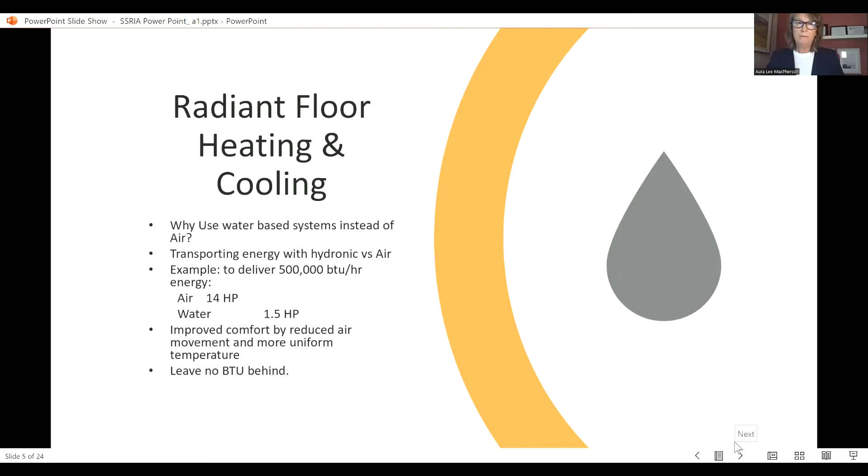We started in 2001 and installed our first in-floor heating into a school, in a crawl space. Most schools at the time were coming in around $2.20, but this one came in at $1.47. I said, wow, that's kind of interesting.

Then we had the opportunity to do a school in 2012, and we did in-floor heating and in-floor cooling on a crawl space. It came down to $1.04.

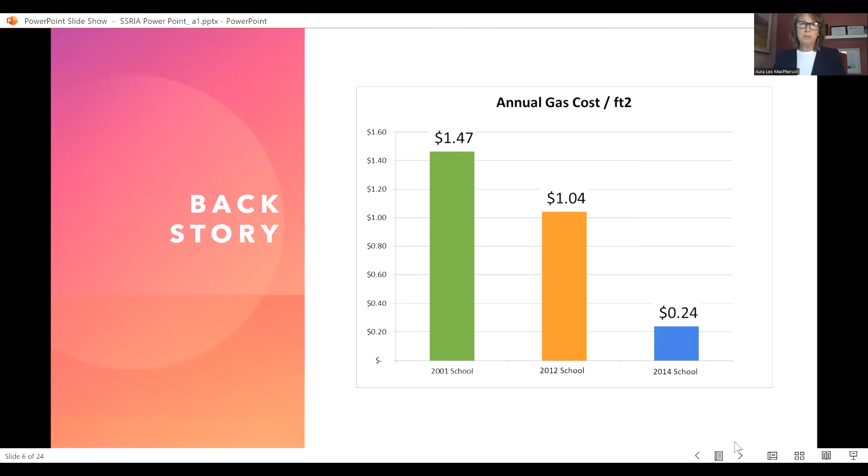We went, wow. Two years later we did another school, but this time slab on grade, in-floor heating, in-floor cooling. We only insulated around the perimeter of the building because we were curious what Mother Nature, what the earth, could do to help warm and cool that building. It came in at 24 cents, and we went, wow, this is going in the right direction.

So I'm going to talk a lot about thermal mass, and I wanted to give you an idea of what thermal mass is. The teepee is a really good example of how it was used the first time. The ventilation system of a teepee is award-winning by today's standards. They put the fire in the middle of the teepee and circled it with rocks. The fire radiates heat, and the rock materials take on that warmth, so that when the fire goes out at night, there's still warmth and comfort in the teepee. That's a really good example of activating thermal mass.

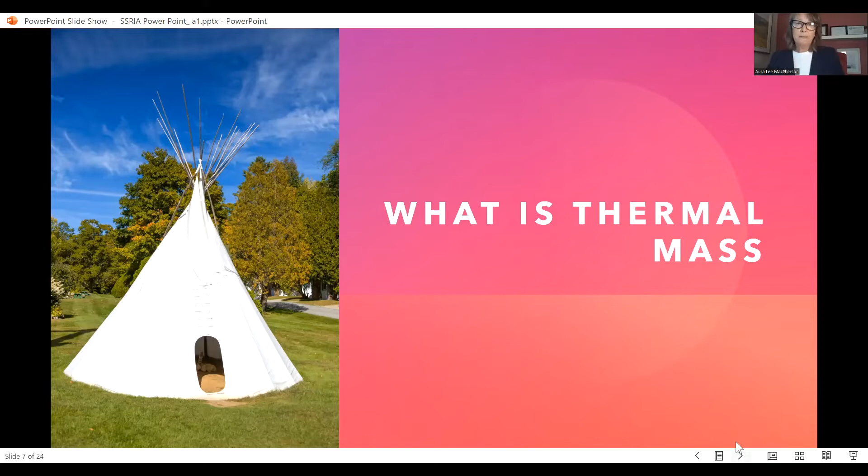Fourth, I was doing some volunteer work, and I had the opportunity to work with Star Blanket Cree Nation. A few members came to me and said, hey Aura Lee and Murdo, we're really concerned about our homes because we think the houses are making us sick.

So that's when the Blanket of Warmth project started. When we went out to see the homes, the First Nations called it a wicked problem. It had been around for a long time. The homes had damp, cold, musty, energy guzzling basements that weren't working. The HVAC system was not working.

Because it had been around for a long time, we had this opportunity to just do whatever we wanted, because nothing had been working. So we said, okay, let's shake this up. Let's use the 17 goals of sustainable development as a platform to see if we can address this issue. And so that's what we did.

The 4 pillars of sustainable development are economy, environment, culture, and social values. There's always a lot of talk about how much something costs or what's the impact on the environment, but we rarely look at the culture or social values. But if you want to design based on the 2030, 2040 global goals, you have to ask questions about culture and social values. That's why Sherry and I said, let's talk about culture, and what affects culture in Alberta, Edmonton and Saskatchewan is quite a bit different than what affects Toronto. So using the 17 goals gave us the tool belt to ask some really good questions.

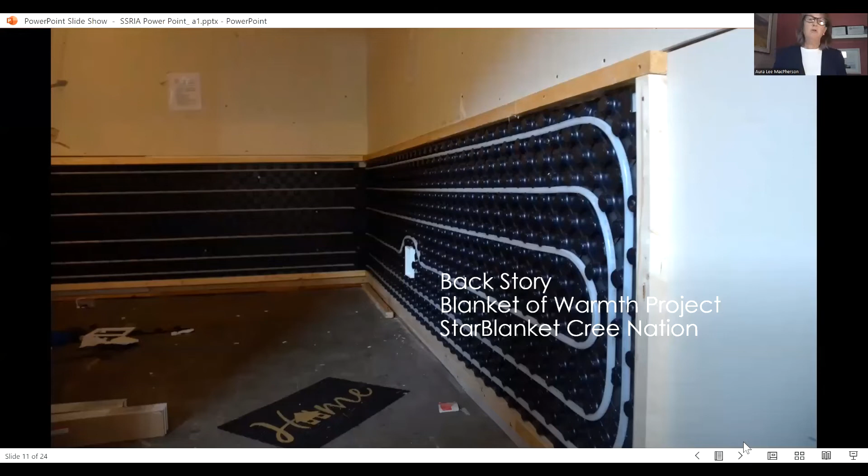We had absolutely no money for this project, so we couldn't tear up the floor and put the PEX piping in the floor, which you usually do. But we had won an ASHRAE award for putting the PEX piping in the walls, and we won that award in 2012. So I reached out to my girlfriend, Nicole Miller at Uponor, and I said, Nicole, would you help me on this project?

And within 2 seconds, she said yes. So we used the Fast Trak from Uponor and put it on the walls. It took like a day to install, it was really quite quick and easy to do. So that was the first innovation we did.

The second innovation we call HVAC art, because remember, we're HVAC nerds. What we did is we looked at what was working in that basement, and the furnace was doing a good job. So we said, let's attach RadiantLink to the furnace and make that furnace work even better. We take the warmth and coolness that the furnace and the air conditioner create, and we put it through RadiantLink.

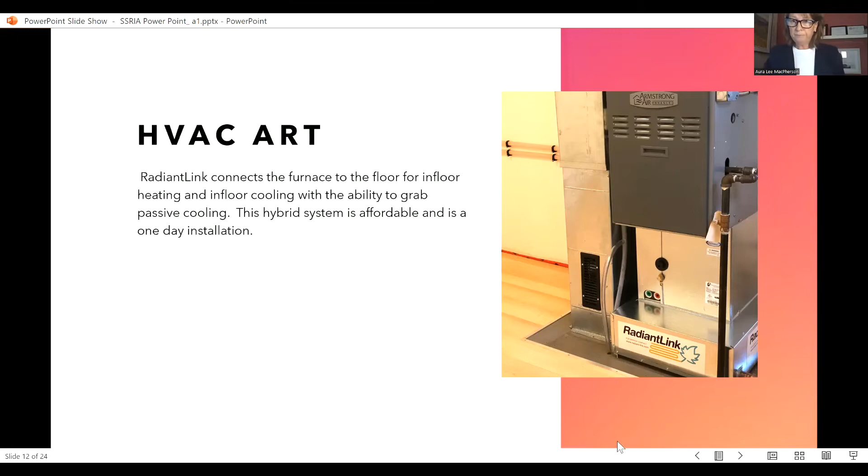We convert that into hydronics, and we're able to passively cool the home. So this is a hybrid system, it's affordable and it's a one-day installation. I'm super proud of our control panel. HVAC design requires simplicity and elegance, and I really think our control panel represents elegance. We've got a small pump, our control gauge and expansion tank, and that's it. That's all there is. So it really is HVAC art.

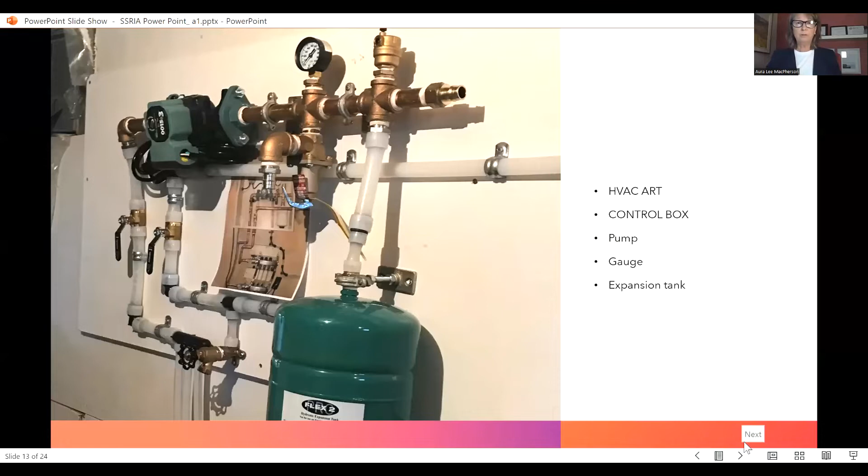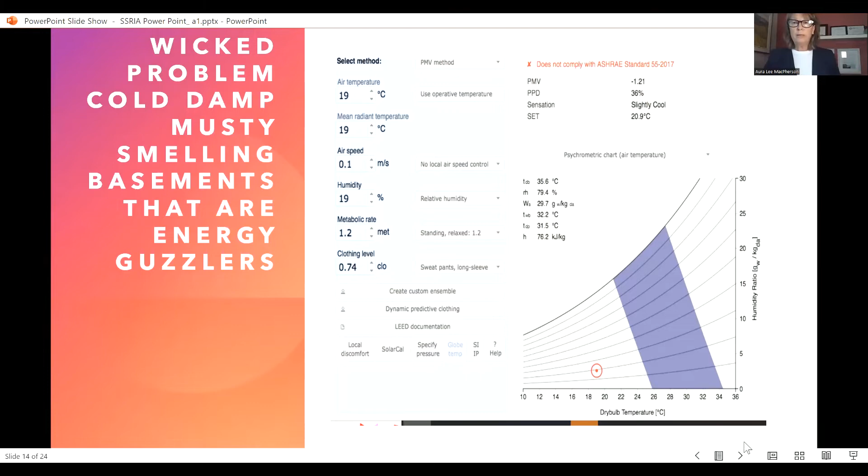When we started tackling the problem of the cold, damp, musty, energy guzzling basement, we reached out to the university and got a capstone student project started with the U of R. We compared 2 houses, one with RadiantLink and one without, and they were both about the same. The home without RadiantLink did not comply to ASHRAE standard 55.

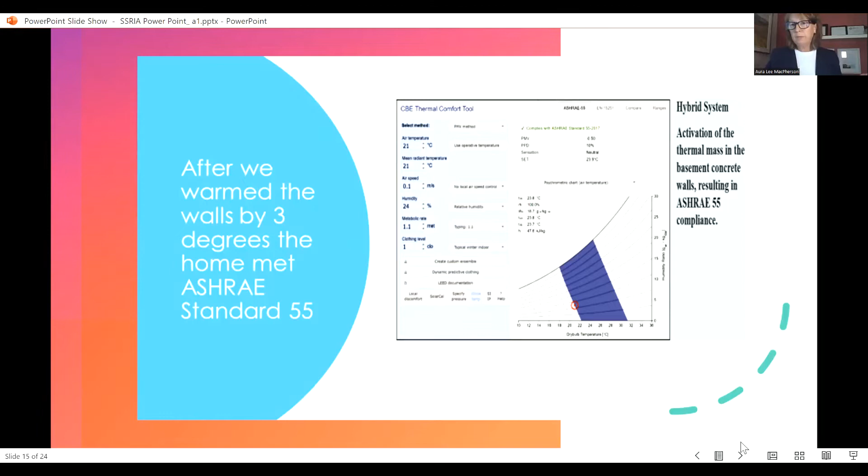The home, after we installed RadiantLink, we were able to warm the walls up by 3 degrees, and we were able to comply. So what that means is this home is comfortable and not energy gluttonous, and we were able to remove the risk of mold because we dried out the wall. Mold needs a damp, musty space, and when you dry out the wall using hydronic, you solve that problem.

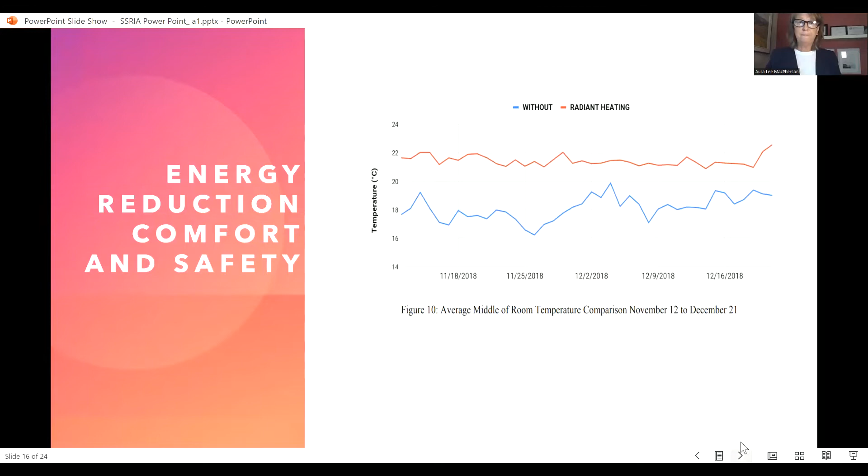You can see that just a simple shift in how we distribute the energy, we were able to increase the efficiency. The comfort we created was between 21 and 22 degrees in the basement, as opposed to 18, which is really, really uncomfortable. So what did we do? The homes complied with ASHRAE standard 55, so they met comfort.

We reduced the energy consumption of the home by $900 a year. This comes from, if people are not comfortable in their homes, they will turn to whatever they can to create comfort, and that's usually at Costco. They go there and buy their plug-in auxiliary heaters because the HVAC system is not doing its job.

But by plugging in those auxiliary heaters, it's very expensive and a very inefficient way to try and deliver comfort.

By activating the thermal mass of the building, we built in 12.9 hours of residual heat during a power outage, which creates adaptation and resiliency. So if we have a power outage and it's cold, that house will not fall apart. We've got 12 hours to get SaskEnergy or SaskPower to do what they need to do to get us back up and running.

By redesigning the HVAC system, we reduce the risk of dying in a fire. If you look at the packaging for those electric space heaters, from November to March, 80% of fire deaths are related to that equipment. So it's like, holy cow, the HVAC equipment is actually putting people at risk. So by redesigning the HVAC system, we take that whole issue of fire right out of the equation.

By addressing indoor air quality, activating the thermal mass, we keep the walls dry. And so that creates comfort, and it improves indoor air quality.

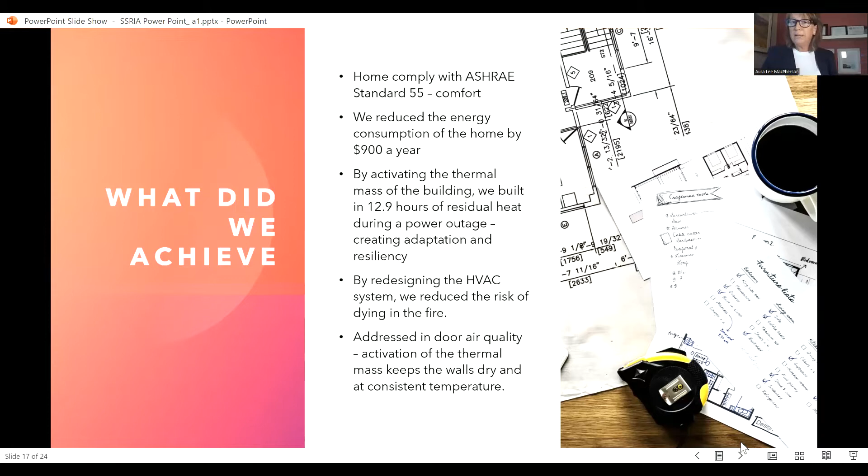We won 3 awards for this project: 2021, the APEX Exceptional Engineering Award. We won a SAB Magazine Green Buildings Award, Technical Award, and we won a United Nations Regional Center of Expertise for this work.

Now I'd like to talk a little bit about the Canada Greener Homes Grant. So there's a lot of talk about heat pumps, and the grant offers funds to homeowners if they install a heat pump. But it kind of puts us in a bit of a problem, because if you look at what ASHRAE said, and they came out with their position paper June of 2022.

I can hear somebody else talking.

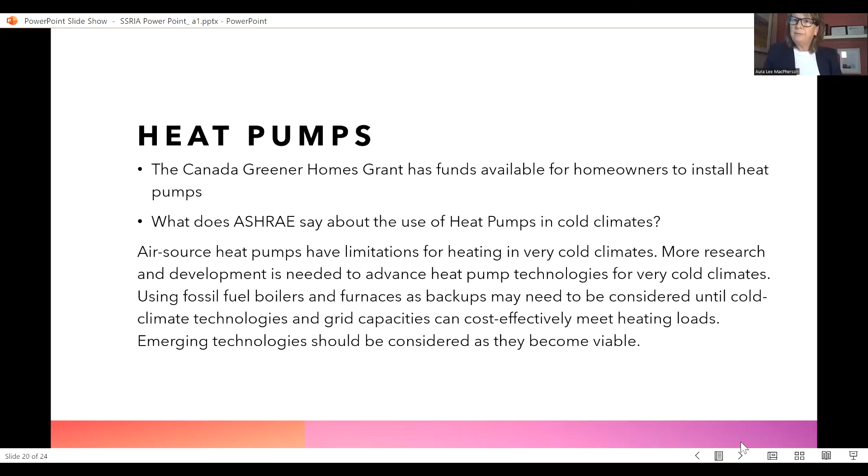So what does ASHRAE say about heat pumps in cold climate? They say more research is needed. They haven't been tested for cold climates. So here we are, the grants are encouraging this, but yet they haven't been fully tested for climates like Alberta and Saskatchewan. So we want to set the community up for success.

What we're about to face requires us all to work together. And traditionally we were all in our own gopher holes doing our own things. But goal number 17 is about partnership, working together, just like what we're doing today, creating conversations, coming together and thinking about how we're going to transition to those 2030, 2050 goals.

We really have to have discussions about responsible consumption and production, because we can't take all the existing homes and throw them in the garbage in the landfill and start anew. That's just not possible. So we have to look at what's working, what can we do better, and how can we build success for the community.

One thing we really have to look at is in the 17 goals, it talks about affordable and clean energy. So the 17 goals set you up to ask the really good questions. So as designers, be it architects or engineers, when we go to design, it's really important that we have the tools so that we can ask the right questions. So putting a heat pump, does that create affordable, clean energy in our provinces when our energy sources aren't renewable yet? I mean, we're working towards that, but they're nowhere near what's happening in BC or Toronto. So we have to ask the good questions so that we don't run amok and make our carbon footprint even heavier. We ask the good questions.

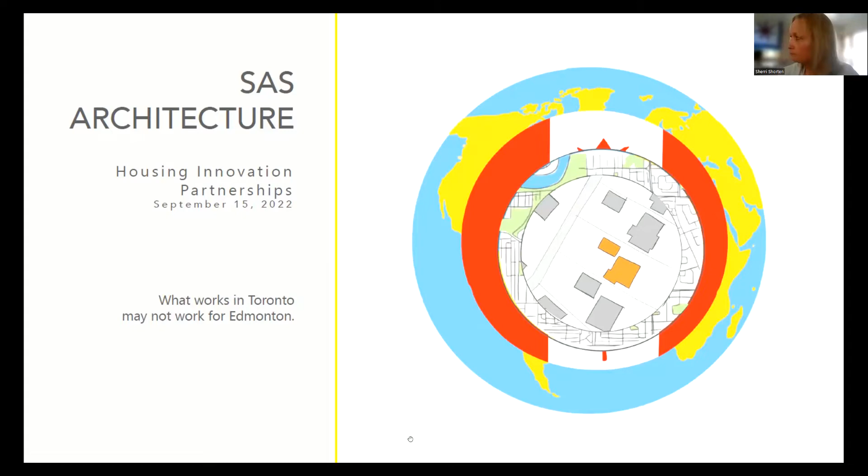So today is a 20-minute presentation on sharing ideas about redeveloping underutilized inner city land, urban land in Edmonton, using smart, sustainable 3D site development design practices. We tend not to want to talk about design practices in terms of regulatory conversations, but I think it's a very important topic that starts to address issues of culture and social issues that Orly was talking about. We are also going to examine sustainable approaches within our city's current planning and development regulatory toolkit, and I advocate for alignment with energy efficiency targets set through the building codes and better design practices. So I'd like to explain a bit more about what that means in terms of changing our regulations.

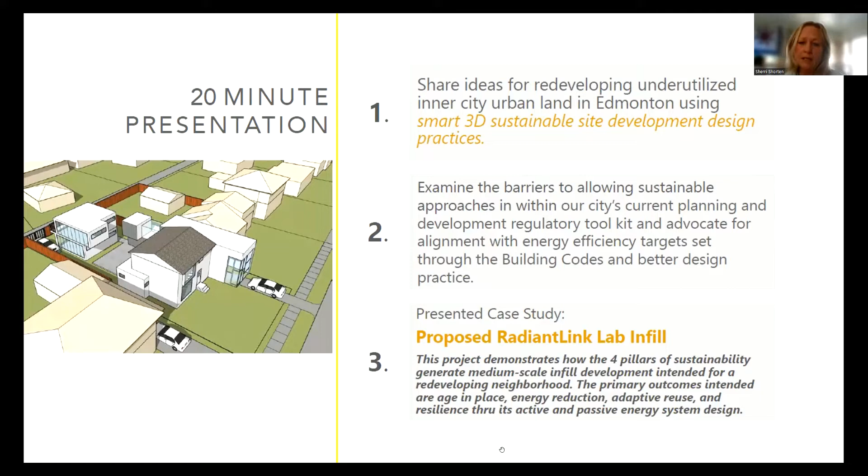You see the bar? I'm going to minimize that. And then I'm going to present a case study, which is our proposed infill project that uses RadiantLink.

So, innovation - SAS Architecture has separate work that we do. We advocate for housing and housing innovation, and to do that, we need partners. So housing innovation partnerships is a big piece of what we do in our firm.

In 2020, working with the architect stakeholder team, we had a roundtable, and Leslie Bain joined us at the table for that. She's from Seattle, Washington. The conversation with Leslie was really interesting because she gave us lessons learned about densification. I think the biggest takeaway for me in Leslie's presentation was that Seattle is the fastest growing city in the US. When she was speaking to us, it was growing faster than New York City and Chicago combined. So they were seeing very intense densification, and with that came a lot of compression on the city and negative outcomes that we tend not to want to deal with when we are so excited about building new and generating economic development with these big projects.

So some of the things that came out of this in Seattle were that rents went up, commercial space got more expensive, and the growth disproportionately impacted vulnerable communities because they had to move.

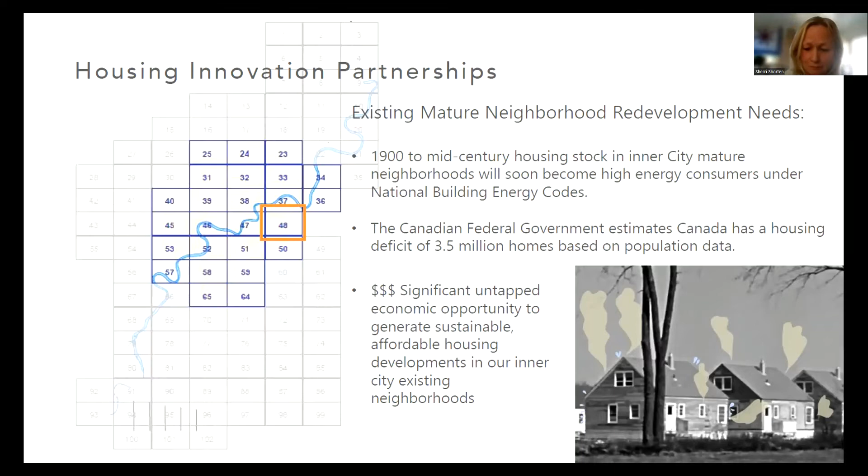So other partners that we're working with, we're very excited to work with IFSA, Intelligent Futures, through the Housing Supply Challenge, also with Ask for a Better World. We're looking at redeveloping an inner city project through that work.

We just completed a net zero ready home in Pemberton, BC. There's a lot of people looking at net zero in BC, so it was really a great opportunity to learn a lot about that type of building.

We're currently working in Vegreville, converting the old federal immigration building from office cubicles into spacious units. It's going to be 41 units put in that building.

And we also work with larger firms quite often. It's another area of work that we do. So we're working with Shauna Noyes Architect on a big project in Kamloops.

Okay, so I want to drill down. Orly talked about global values, and I want to keep drilling down to the neighborhood, right down to the lot. So the context that I'm showing you right now is a piece, a portion of Edmonton where I live, my community.

There's a lot of new development. There's a very big development that is happening. It's called Regency Developments. I don't know if you can see my cursor, but it's down here at the corner where the circle is. Across from that is the Boardwalk. And the subject land that we're developing here is where you see this square.

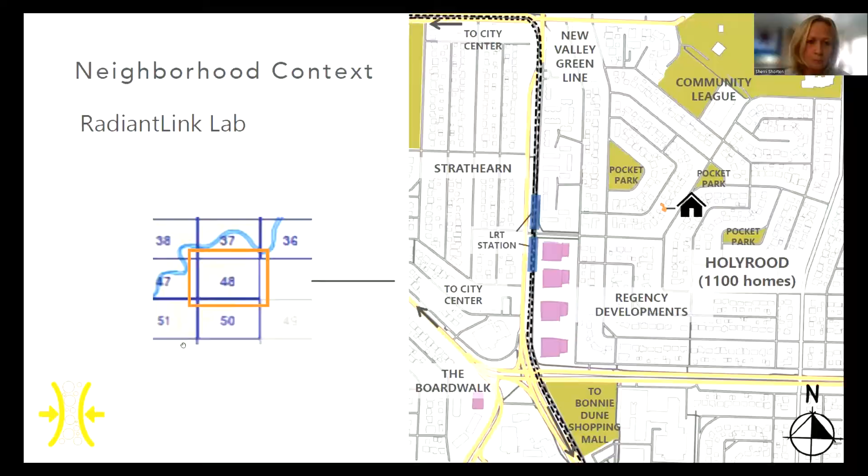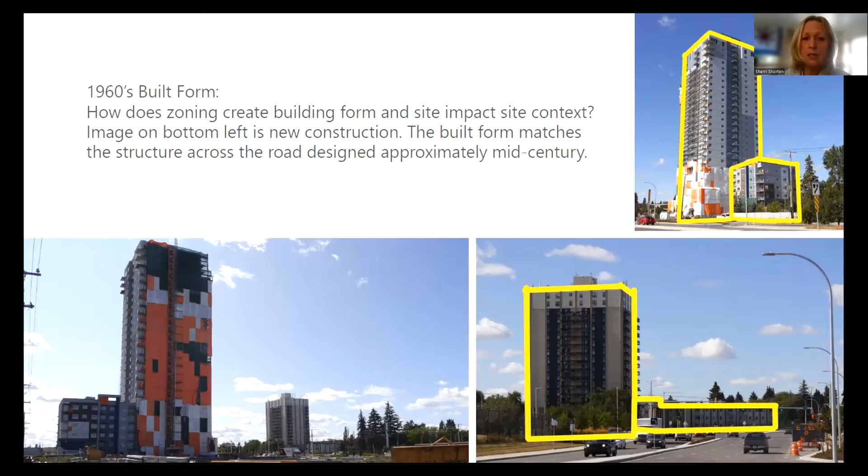So the question becomes, what do we change in those regulations and what do we keep? Why regulatory reform? We're moving to values-based codes in order to pick up those social values that are being sort of left out of the conversation. So the importance of local policies and regulations relates to how we bring society's vision and the values that go along with it to life.

20th century planning involves shaping our cities and changing values to people, to center people and to center culture in the design of the cities that we share. City builders are people who put relationships, share policy making, or design buildings in public spaces. The legal basis of code values, such as public safety or health and welfare, are a set of values behind everything we design in the architectural and engineering industry.

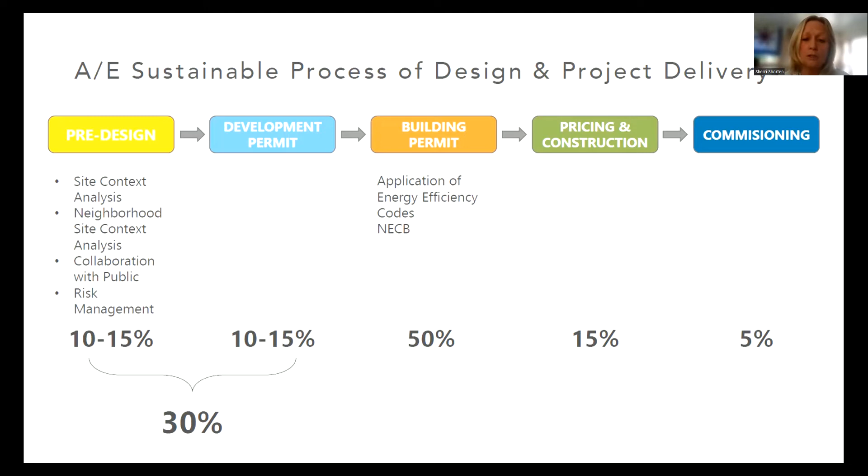Another point about regulatory roadblocks is that to deliver a sustainable project, we as architects and engineers work through a very set process. Site development and site analysis happen very early, during zoning regulations, and that's when we want to be designing and considering sustainable goals. The tendency I hear repeatedly in our city is that we deal with that at the building permit stage, because building codes enforce energy efficiency. But by that time it's too late to apply the better site context tools, like I showed in the Regency project. And after we've spent 30% of our fees, we're not going to go back and rethink things. So starting early in the process is where we need to talk about sustainable design, not at the building permit stage.

Let's look at the original 60s neighborhood we're trying to renovate, typical of most of our mature neighborhoods, anything from turn of the century to 60s and 70s housing. This is the location where we're proposing a RadiantLink Lab, which is basically an infill.

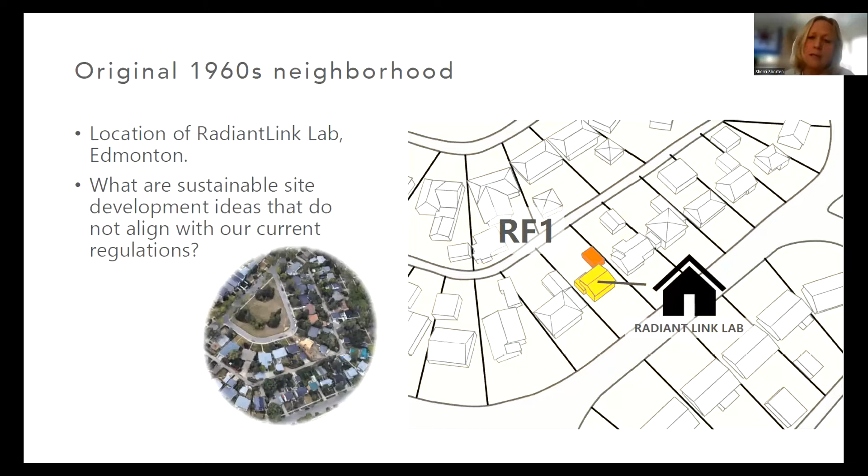I'm going to talk about the use of our 3D modeling tools for massing and solar studies, work we do at early design to understand how that delivers on the goals. The goals we're trying to achieve on this site are: good health and well-being (goal 3), affordable and clean energy (goal 7), industry, innovation, and infrastructure (goal 9), reduced inequalities (goal 10), sustainable cities and communities (goal 11), and responsible consumption and production (goal 12).

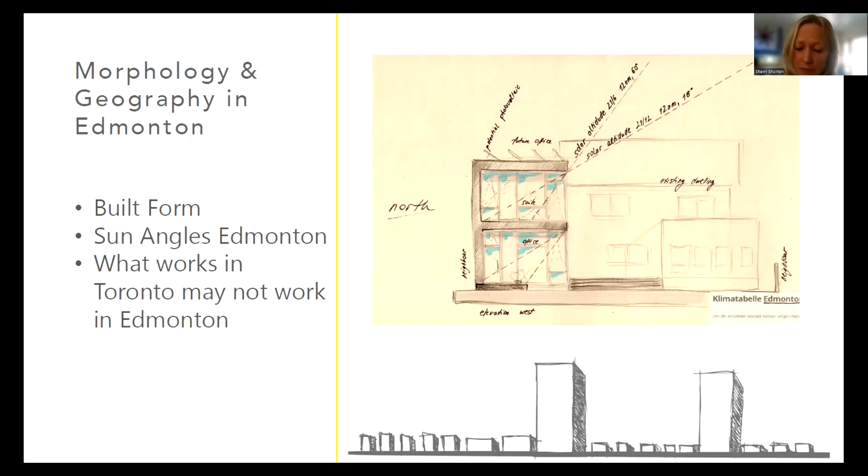To start talking about site development and site design, we need to consider morphology and geography, thinking locally, because what works in Toronto may not work in Edmonton. Solar studies are done to determine impacts on neighbors, and the sun angle in Toronto is not the same as in Edmonton, which is a very northern, cold city. So when we build tall buildings, we create dark, unfriendly spaces that aren't comfortable. That's a very important conversation we're not having in Edmonton right now, and we'd like to have it.

So the conversation is: how can we build differently? How can we build more gently? How can we increase density a little more moderately and find a middle ground?

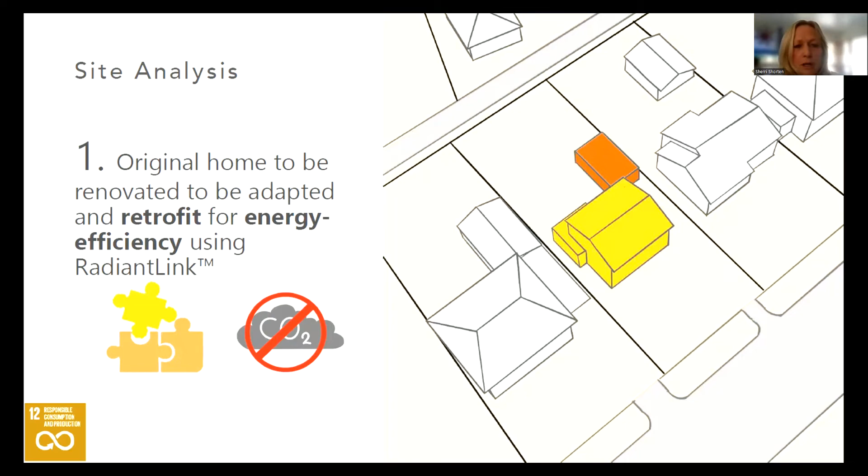For the site analysis of this project, first we're going to renovate and adapt the existing home to retrofit energy efficiency using RadiantLink, the same systems Orly mentioned. They're affordable, local, and effective, and will increase the temperature in this under-insulated house, making it more comfortable and more energy efficient. We're also going to add a garden suite for passive income, an age-in-place concept that adds to socioeconomic equity. Personally, I'd like to sell off the back lot—that's not possible right now, but someone could move into the back lot while the front lot stays for a while and gets redeveloped later. That's different from what's happening now, where houses are knocked down and lots split down the middle to create just as much density. This is a more organic way to develop the lot.

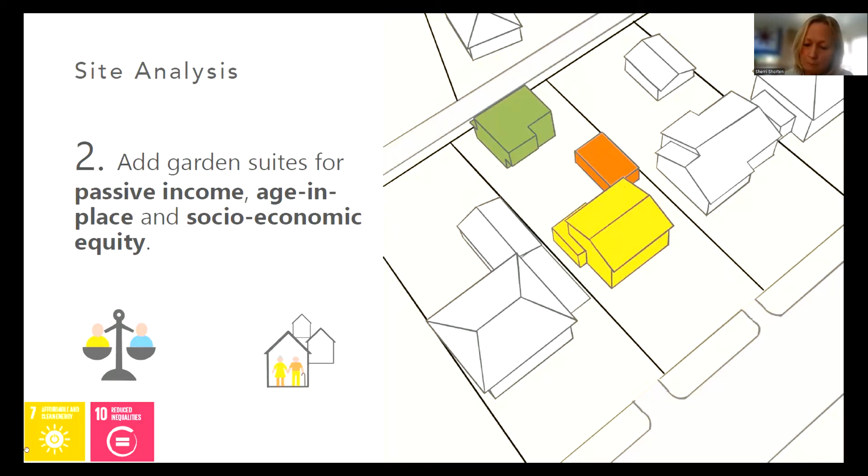And thirdly, we're going to add a commercial office. So this is an adaptive reuse. It will be a commercial office plus a dwelling, and it will also be energy efficient. There's a lot of challenges with that office structure in terms of getting this through zoning, our zoning right now. We'll show you pictures at the end of the presentation of what this looks like.

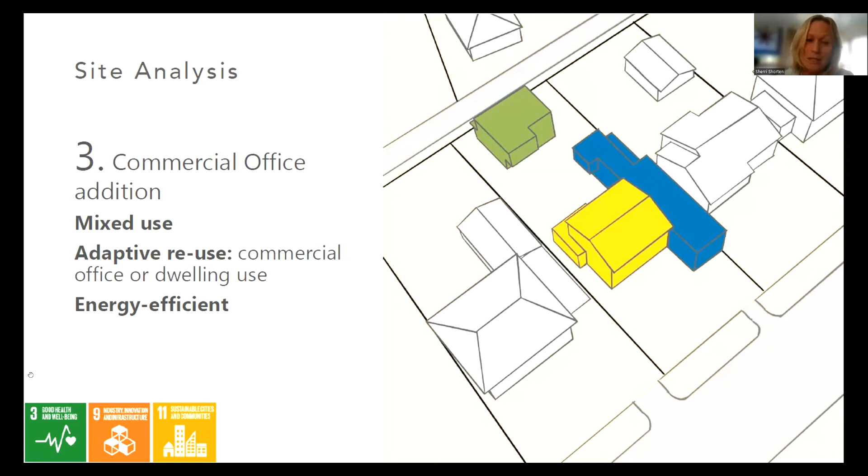The biggest problem right now is that because we don't have laws that recognize some of these social values like adaptive reuse and aging in place, it's very difficult to convince our city planners to shift off of their 1960s templates that they really have to follow. So we're both struggling to have this conversation and to make this work, and it's taking far too long. This work is coming up now in our city of changing our regulations, and we need to be there and continue to advocate for sustainable site development opportunities.

So this is the plan, and what this does is increase the floor area ratio from 12.61% to 47.3%, which represents - actually that would not be very much density, but it does increase the density of this site, which would be 1 occupant to potentially 10 occupants. And the floor area ratio is increased by 73%.

So on the one hand, the original home being at 12.61% is extremely low in terms of how much density we can currently build on this site. So building to 47% is not a stretch on our current regulations, but it certainly is a stretch on public perception to have this kind of development come into the neighborhood, which is where some of the problems lie.

Sherri, you're muted for some reason.

So the 12.61% is low, 47.3% is not that far over from what the laws allow, but yet it's still a very difficult process to enter the planning application process and execute this work without significant time and energy put in. It would be nice if this understanding of what sustainable building was built into our regulations already, and we wouldn't have to spend that time.

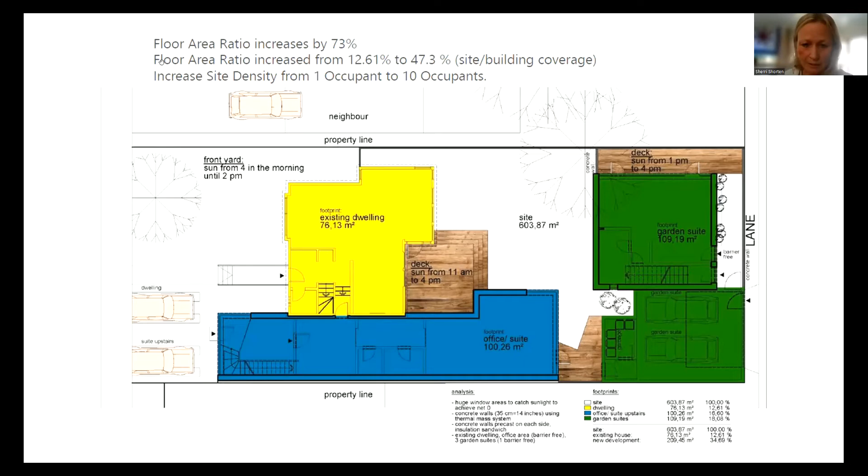Okay, as mentioned by Orly, we're going to use the RadiantLink system, which uses thermal mass, and I'm not going to explain it because Orly has already explained it, but this is the addition onto the house. We're taking a space beside the house - it's a driveway that's a vacant space - and filling it in with new construction to make way for space for people to occupy. It's just a dead space on the lot right now.

So at the end of the day, we will use passive design to achieve 20% CO2 reduction. The work of the thermal mass dynamics is our next step - to look at what they will accomplish. And quite frankly, the challenge there is that we have just recently got to the point where we have the tools to be able to do this. The free tools we get from the government don't have all the scripts and whatnot to fully understand the impact of thermal mass dynamics.

And that's what Orly was talking about, what they were seeing in the schools and that reduction of energy use through a radiant cooling heating system. This is data that has yet to be tapped into. So we're estimating with this project that we will easily achieve the 50% by 2030 to be compliant, but we know that we can go much further. So our next steps are to do the data testing.

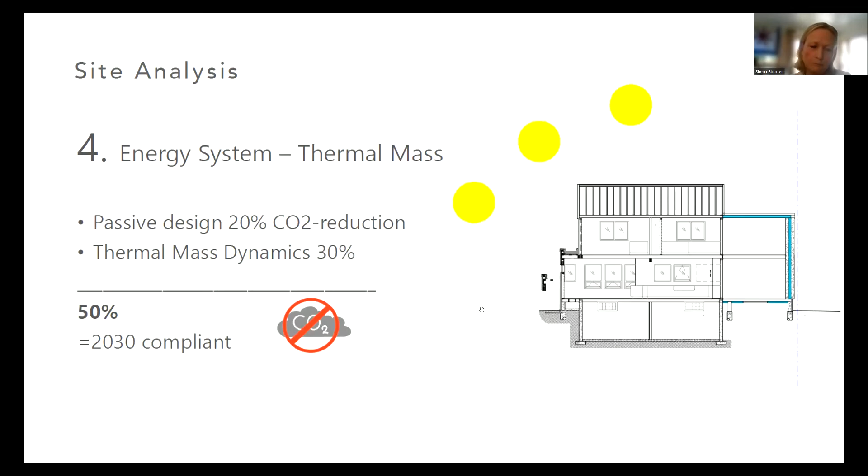When it comes to energy building in housing, what we're really talking about is thermal mass, the walls as a thermal mass. So even if we were talking about a stud wall, a passive house wall, we're still talking about a massive wall. A critical piece of the energy efficiency equation that helps us succeed at achieving the targets is really in how we design that wall. So through this project, we will be looking at various wall systems and testing how they interact with the radiant system. We're looking at concrete, but we're also going to be looking at a wood frame building.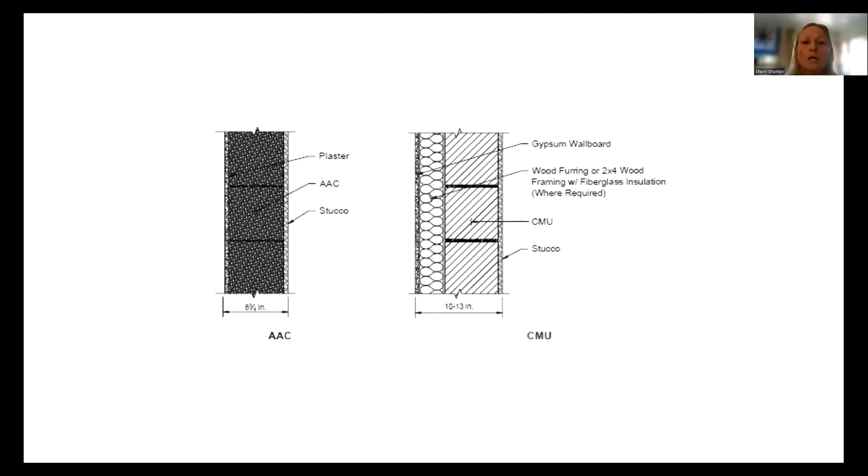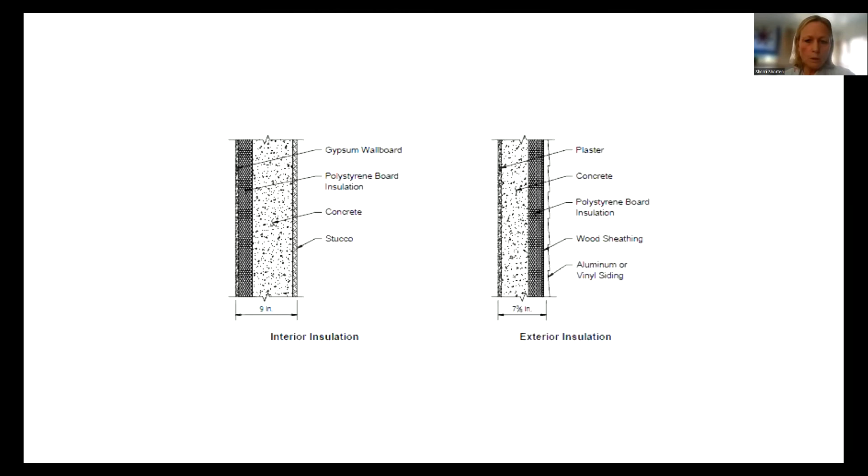So this is just some illustrations showing mass walls - exterior insulation, interior insulation, adding to make the wall thicker and more resistant to energy loss - that's the basic fundamental theory. Orly already explained some of the energy system of thermal mass, but we tend to talk about housing as adding 4 inches or 2 inches of insulation on the outside of the house. And we have in the past really given concrete a hard go, although concrete is the most widely used building material on earth.

As a result of its versatility, beauty, strength, and durability, concrete is used in most types of construction, including homes, buildings, roads, bridges, airports, subways, and water resource structures. So it's unlikely that we're going to stop using concrete. Our primary analysis of this project, because it is inner city, is to look at durable materials like concrete - a concrete wall.

And when we think of the concrete wall as performing not only the heating and the structure and the beauty, it's actually achieving a lot of tasks at once. But how do we measure that and the value of that?

Some of the characteristics of thermal mass in concrete are that it has fewer spikes in heating and cooling requirements due to concrete's low thermal conductivity and high specific heat capacity, which is desirable in building construction. In climates with larger daily temperature swings, thermal mass uses less energy than similar low mass buildings due to reduced heat transfer through massive elements. Thermal mass can shift energy demand to off-peak time periods when utility rates are lower, reducing peak loads in many climate locations. Thermal mass works best when exposed on the inside, and it increases livability by addressing comfort.

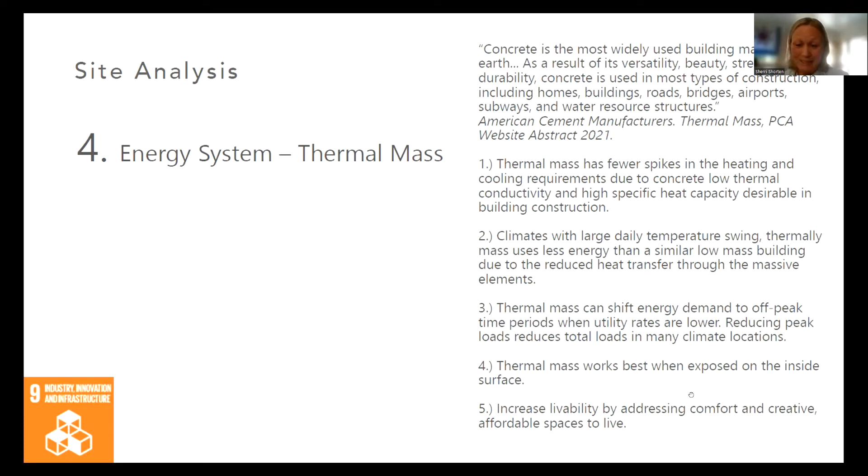So here's the plan, and here are some of the ideas of energy efficiency in this lot, and the sustainable ideas that deal with the 4 pillars, not just the typical things we concern ourselves with, which is the energy bills.

So you can see that this flexible office space could also convert to a dwelling. We have created a plan for this addition. This could be the existing dwelling, could be a family home. It's a 3-bedroom home. We could add 2 units in the back. These are unit 1 on the bottom, unit 2 is on the top.

The blue shaded areas would be concrete walls and they provide the major support for the building. We're trying to reduce the number of materials in this project to minimize construction time.

We'll use solar panels where we have a lot of solar gain. We'd like to use the thermal mass as a battery, and we will be doing in-floor, in-wall heating and cooling.

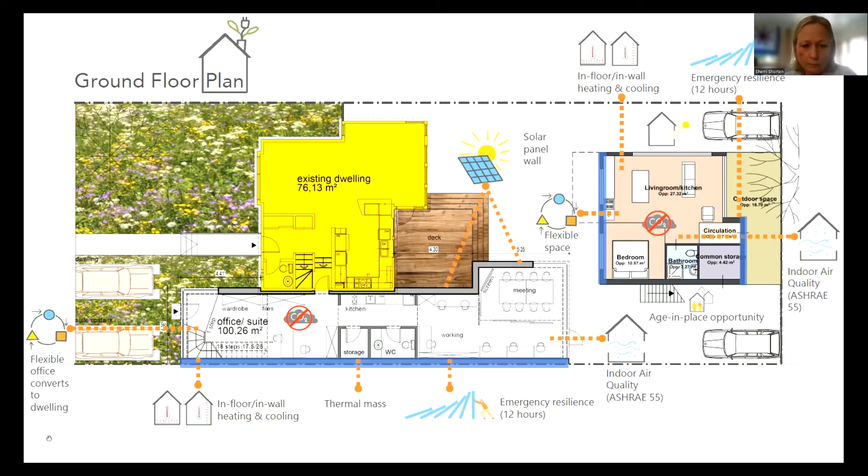Sherry, our time's almost up. Oh, okay, so we should wrap up. But at that, I have some photos, some images of the project that I'd just like to share. I can leave it at this.